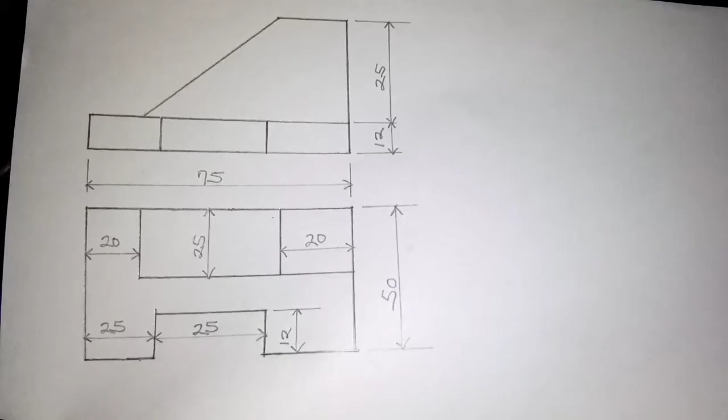Over here now we have an isometric block, and then this is how it looks after construction, but we'll follow step by step to see how to construct it very easily.

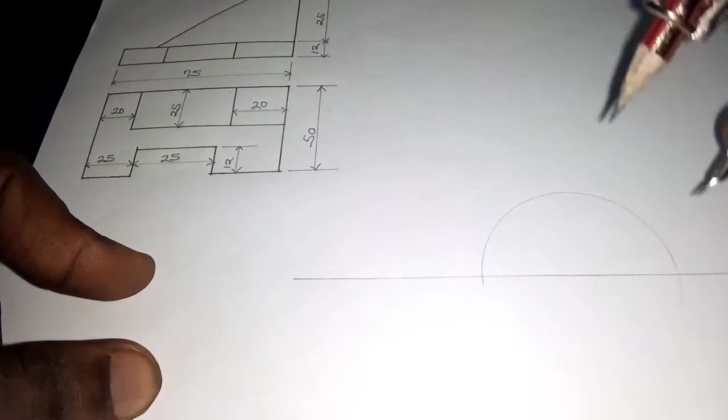First of all, we'll draw a straight line, and every line we start with faint lines, and on this line we are going to bisect the line and construct angle 30 degrees to the horizontal, to the left and towards the right. So this is the procedure for bisection of a line.

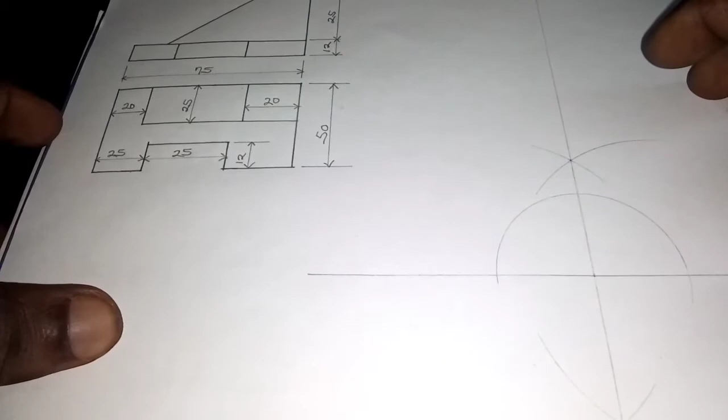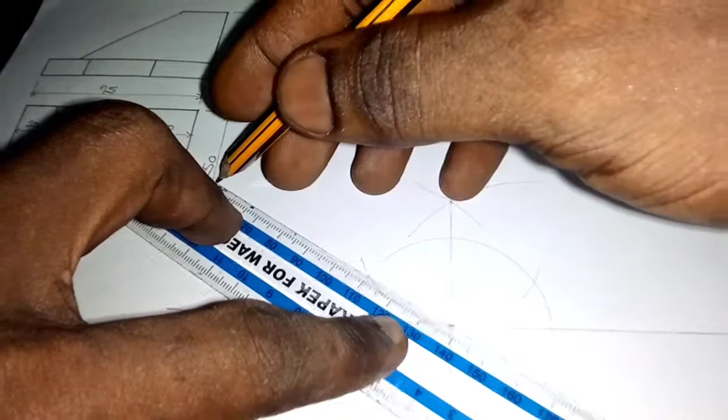And after bisecting the straight line, we can then construct angle 30 degrees to form the base for the isometric drawing. Now that's the 30 degrees, and that's the method of construction of 30 degrees to the right and also to the left.

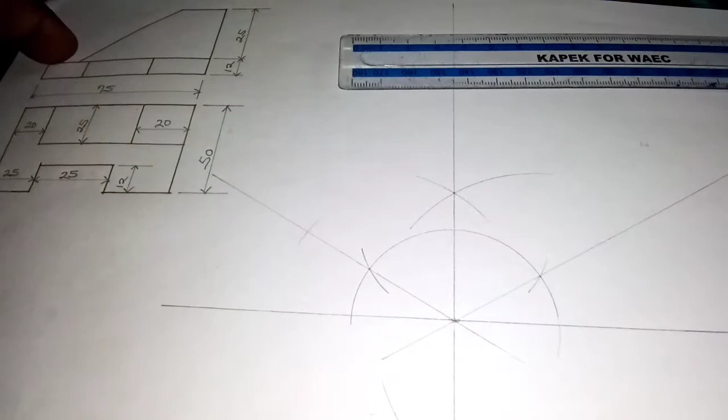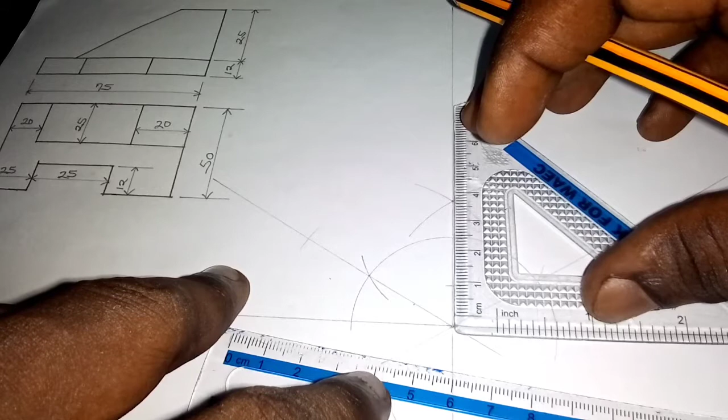Now every dimension on the diagram given above, because we see it in first angle orthographic projection where we have the front elevation and then the plan. So we pick the dimensions just as it is seen there, and then try to make it the same thing on the isometric projection or the drawing.

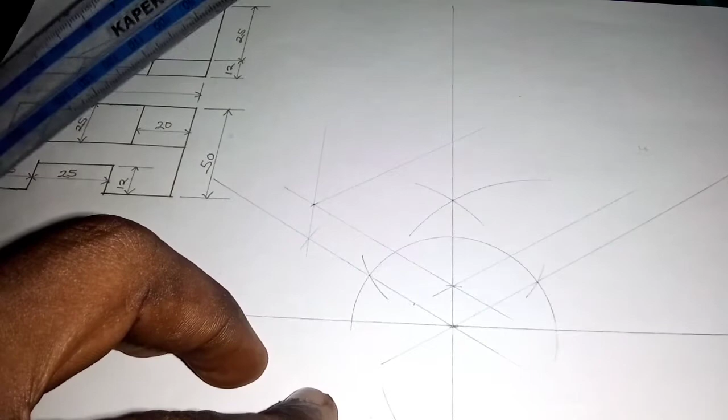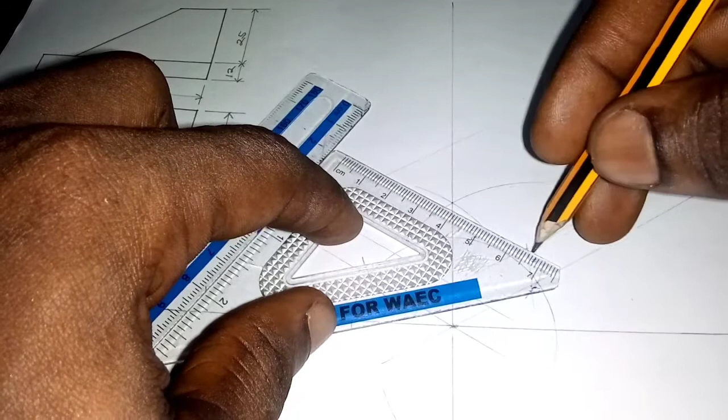We measure 25 as can be seen on the plan. What we're measuring now is 25 mm. On the diagram, where we just marked now is 12 mm. We project lines to that point and then draw it.

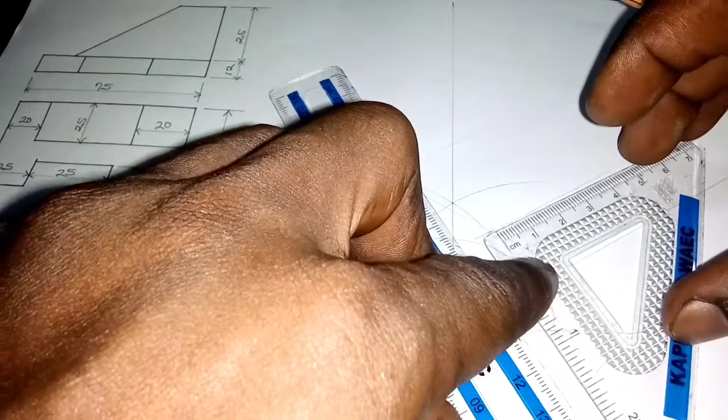Next is to measure the distance from that point, which is 25 cm as can be seen from the plan. Now we project a line to draw on the other side.

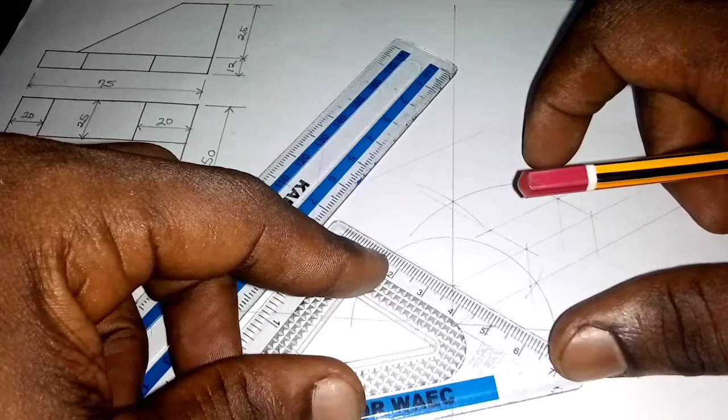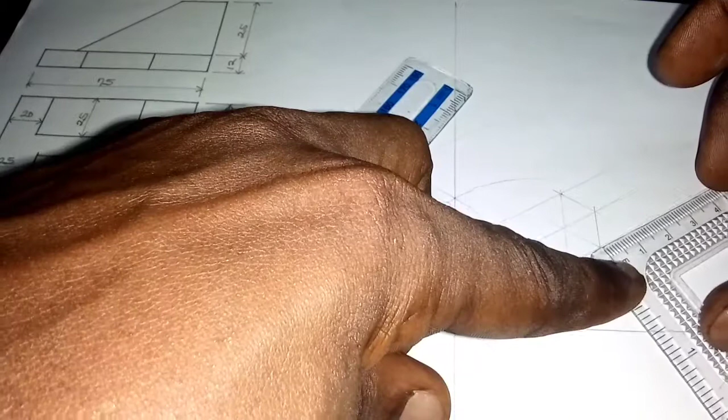Now from the plan, we can also observe that since we have 25 cm on the other side, it means the back will also be 25. That means we measure 25 also at the back. So we project it upwards.

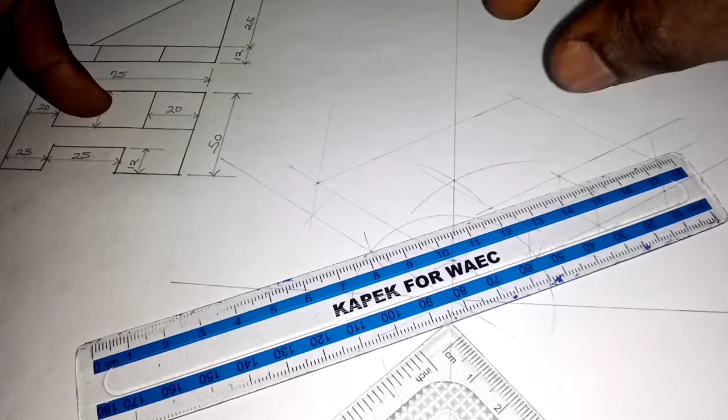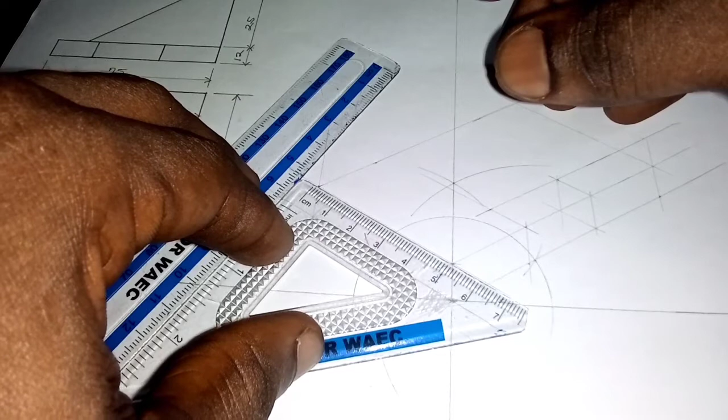Looking at the drawing, we have done the base. Now what is left is the other part that slants upwards, and we can actually put it there because from the plan we see the dimension well stated there. So all we have to do is to measure exactly to the point where it starts and then try to get it exactly the same way so we can project it upwards.

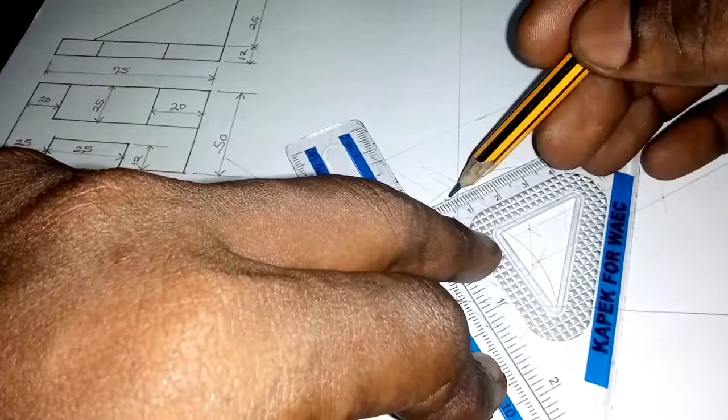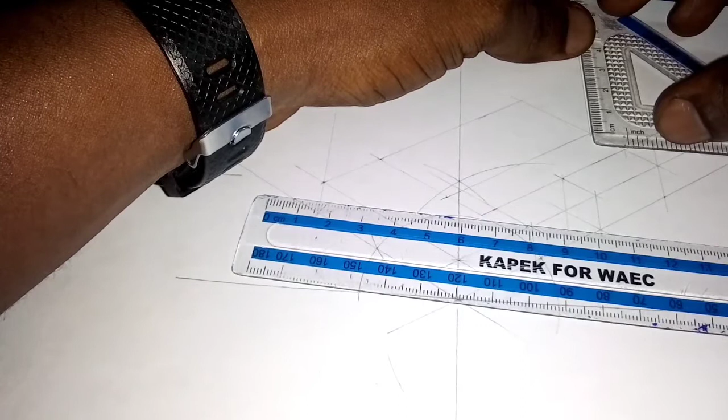Now the thickness of the part slanting upwards is 25. We project a line from the other side as well. We take a straight line, that's a vertical line to the end, and raise it upwards. We have to measure the height of the part that is protruding out, and from the diagram we have it there as 25 cm. We need a straight line from that point, so we project a straight line to that point.

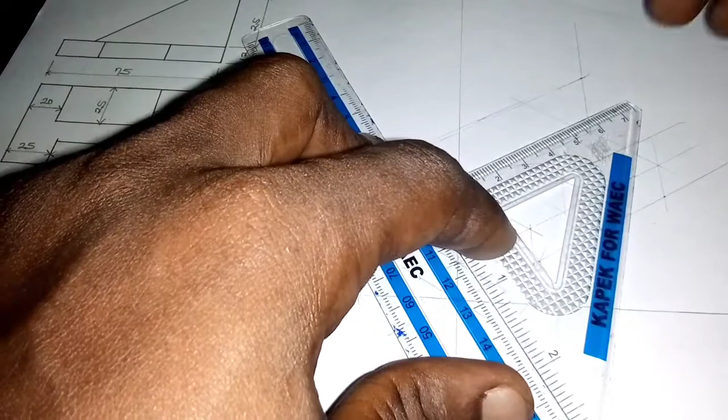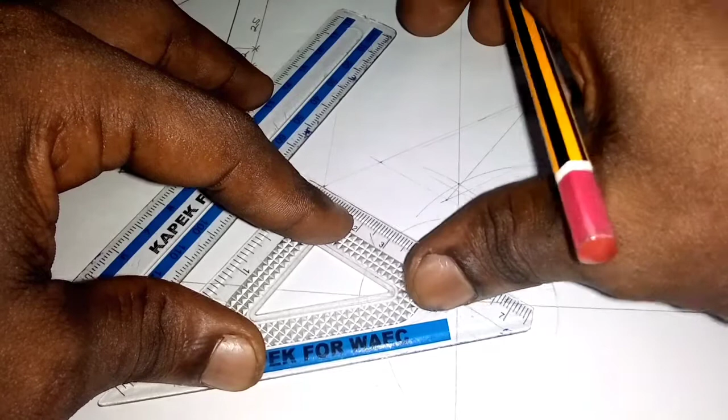Now on that straight line we're going to measure the length of that side, and it's 20. From that side now it slants down. Since we are having it in isometric projection, it means we have to be able to view this shape in three perspectives: the front, the top, that's the plan, and the side view or the end elevation.

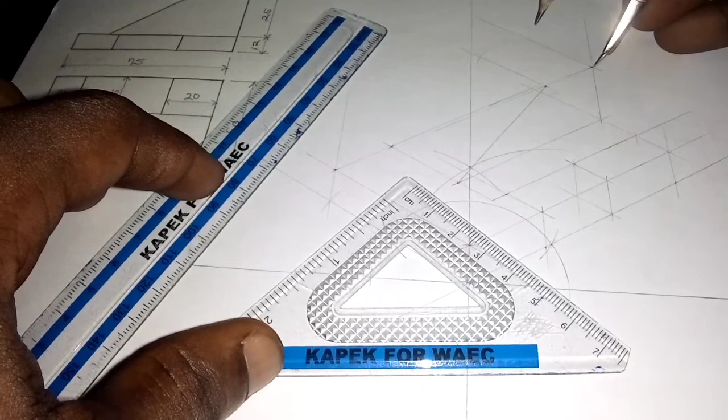So what we have on one side, that's the line slanting down where we're marking now, is the same thickness, that's 25. We join it with a straight line and then make it slant downwards, just as it's being described now. And every construction here is with faint lines. So everything is now all set. Now we have to make it bold.

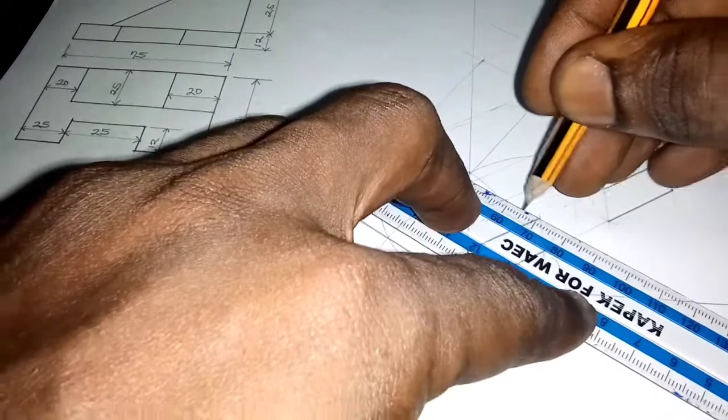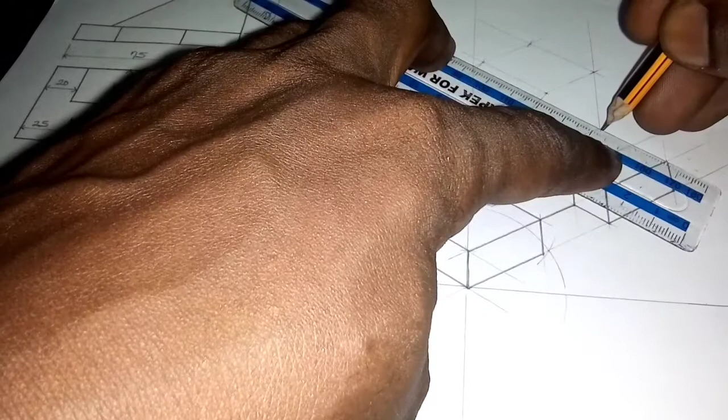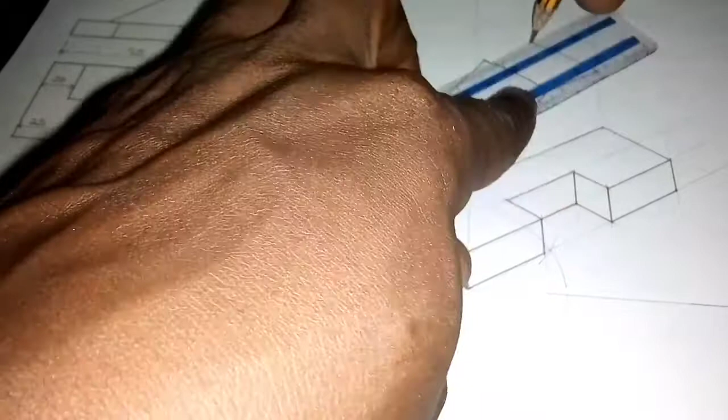Looking at it, the shape is gradually coming out and we are almost done. If we follow these steps in construction, isometric projection will be so easy. So having said and done, we are almost done. This is the first angle orthographic projection given in isometric form.